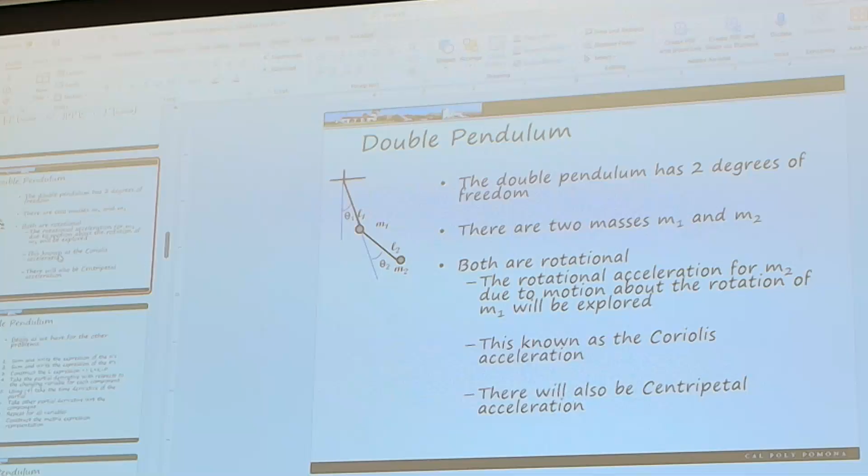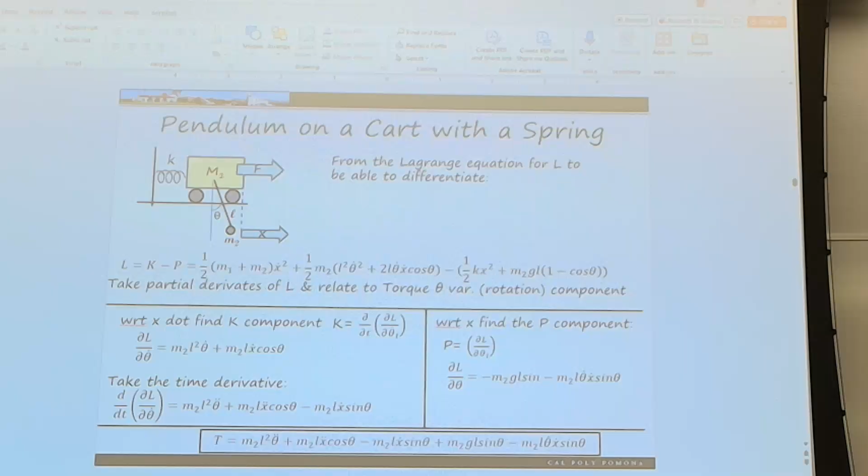All right, so kind of recapping, the idea of using Lagrange is really where we can circumvent doing the detailed Newtonian analysis, and instead we're going to be looking at it from an energy perspective. And we looked at it here when we were talking about this pendulum with a cart, where we looked at the force, and we could look at the torque. And so we're looking at those different variables, and the process of doing Lagrange.

Really, we compute this L, which is the difference between our kinetic energy and our potential energy. And we write the terms of our kinetic and our potential energies for each one of these entities. So we're looking at it in terms of the force and in terms of the torque. Once we find those, then we're going to take this L, which is that expression, and we're going to take the partial derivative with respect to theta dot, which is really the velocity that we've been talking about, and so that's our motion.

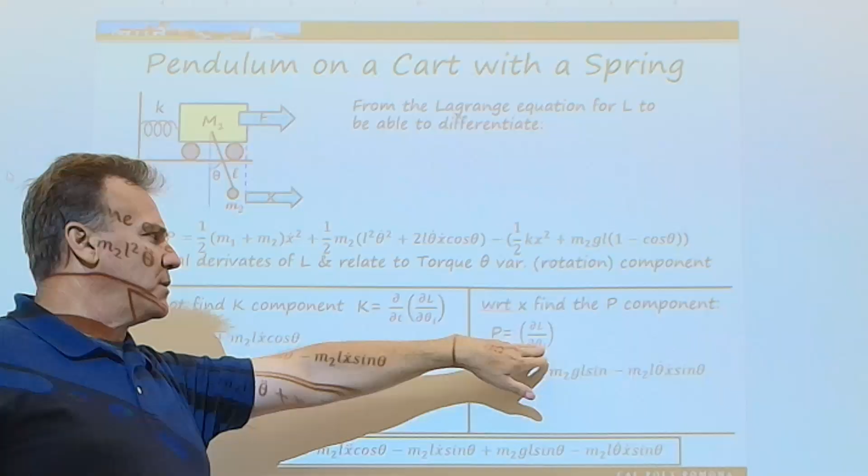Think of that as our motional force, or the force per motion, and this is our potential. Right? So then we're taking it with respect to not the velocity, but the quantity itself. Because we're looking at this right here, we then take the time derivative, because we're really looking at the velocities. So we're looking at velocities relative to a particular parameter.

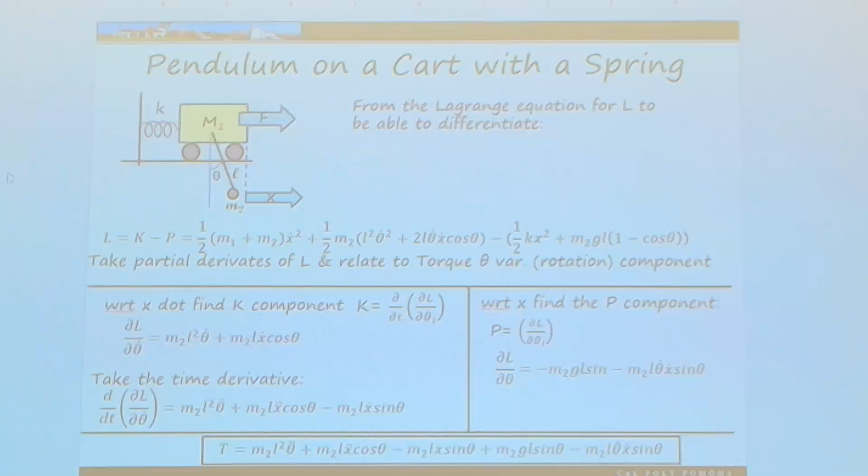That's the idea behind taking this one there. So we have this relationship of L, and we have this relationship of L. So we have this one and this one. So here is our P, here is our K. We do that for both types of quantities.

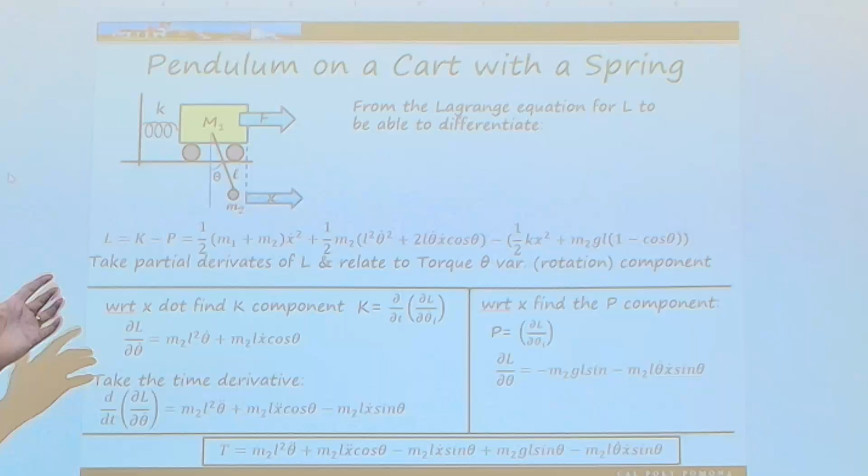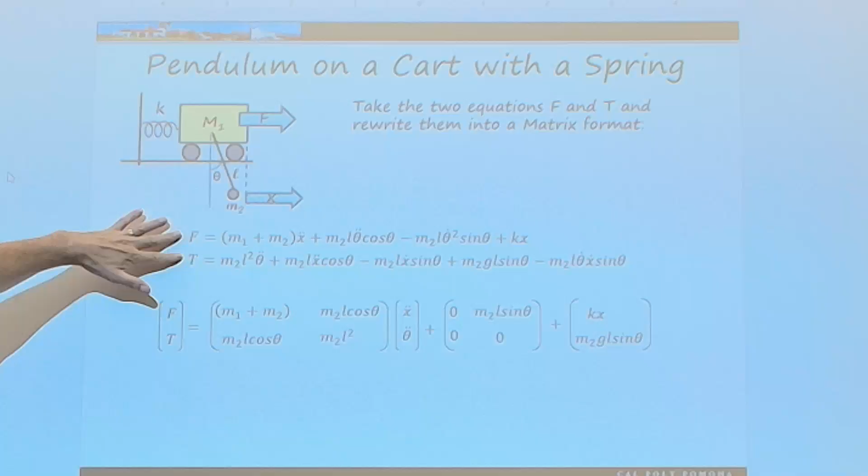So we're looking for the force of this and the torque exerted on the pendulum that we had right here. All we have to do is write those expressions. Once we do that, we can combine both of them together so we can express the relationships of the two energies through force and through torque, and we have the Lagrangian relationship right here.

If you decided to do this using Newtonian, this would work too. You get the same answer. One's a little bit easier in the sense of it's much more methodical.

This is a methodical approach. You kind of just do it, and you go through and you take the derivatives, take the partial derivatives, take the partial and the derivative again, and you're good to go.

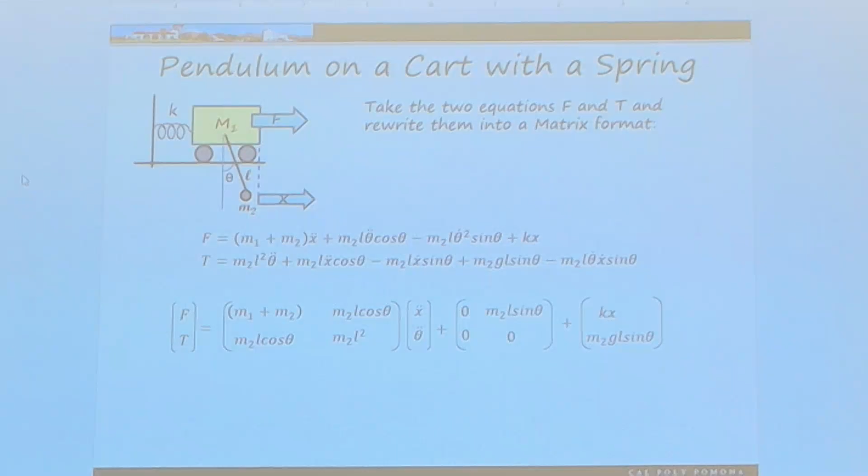Okay. Any questions on what we were talking about on Wednesday last week? It's pretty straightforward. Yeah. Because we can talk about this double pendulum.

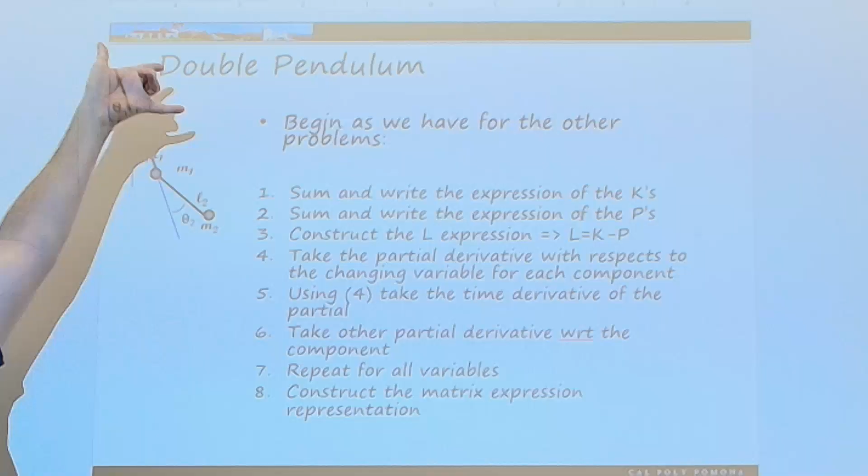In the double pendulum, we were talking about, if we look at it, it was really, if we flip this upside down, almost it looks like a robot arm that we talked about before. Right? I think we've done that before. So we could use that same process.

And so initially we'll talk about it as a pendulum, but at the end of the day, it doesn't matter if it's a pendulum or not. It's really got these couple of joints. And we can do 3, 4, 5 all the way down. But again, we go through that same exact process.

Write the expressions for our K's, write the expressions for our P's. Find L, nothing more than K minus P. Take the partial derivative with respect to the changing variable for each component. So we would do one for theta 1, we do one for theta 2. That gives us these two masses.

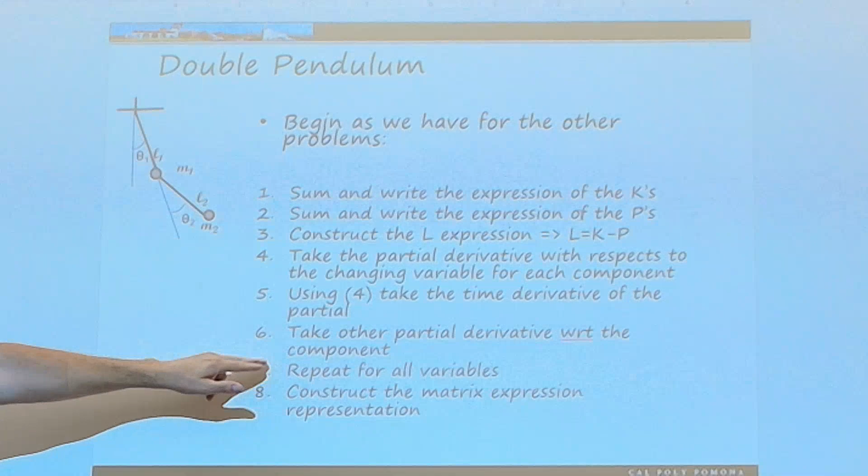We then take the time derivative of the one that we took the partial derivative of from this guy. Take the other partial derivative with respect to that component. Repeat for all variables. Okay.

So we just kind of do this over and over and over. If we had 3 joints, we would do this 3 times. Theta 1, theta 2, theta 3. If we had 4 joints, we would do 4 times. Theta 1, theta 2, theta 3, theta 4. So on and so on.

Yes, it gets tedious. I'm not going to deny that. But we can actually write code to do that kind of stuff for us. So we can actually find the Lagrange from a computational perspective much easier than just going through trying to see this big picture, doing the Newtonian, doing all the free body diagrams, yada yada yada. It gets tiresome. So here's what we have right here.

So in our double pendulum, we're going to have our kinetic energies. And that's what we have in this case. So we have the one with theta 1. And then we have theta 2, which is really a combination. This is a combination of this angle and this angle.

So if we're looking at the force on the mass or the torque on the mass, we have to recognize there's a common element of theta 1 and theta 2, not just theta 2. So we see that double angle that we see right here. So we see the one by itself, and we see the combination of those two. Everybody with me so far on that?

So we're looking for the kinetic energies, so we find the K1, the K2, here's how we find that. And we're going to get each one of them. And in this case, we actually found a velocity squared, and we'll see why in a minute, but it's 1/2 mv squared is the reason why. And that allows us to simplify in the future. You'll see that on the next slide after this, the following one.

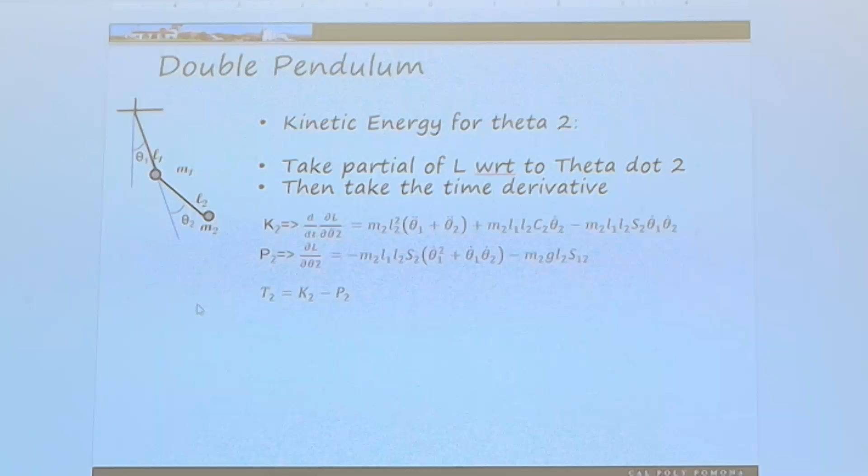Then, now that we've got that expression, we can do that for each torque, and we can actually construct them into the matrix. So we can do that. Here's 2—I think I skipped 1. So there's 1. And that's kind of the same thing here, but now we're doing that for 2. So here's dt of partial with respect to theta 2, and then this is take the L, take the partial with respect to theta 2, given the L that we had. So again, we're starting off with this L right here. And there's just simple calculus.

So we go through, we do T1 and T2. We can matricize both of them and extract our variables so that this becomes the relationship for theta 1. This is for theta 2. This is the second part for theta 1, and this is the second part for theta 2. Notice torque 1 is going to have this component, right? It's got this guy right here for theta 1. And then theta 2 is just going to have these guys. And what's interesting is here you see that this only uses the theta 2s. And then we've got this expression right here.

So this is actually like our angular acceleration, right? That's going to be theta double dot. We know that theta double dot is an acceleration of the angle. We could have called it alpha if we wanted to, but we'll call it theta double dot. What we see right here is the square of a velocity. And that's like an acceleration, but it's not quite. Same thing over here is like an acceleration, but it's not what we think of as a rotational acceleration. There's something else—as it's increasing the velocity, we see that it's growing. So it's not in the truest sense an acceleration, but the velocity is growing at the square. That's the contribution of that torque. And we see that same thing here, except now what we see is the velocity of each component impacted onto the torques, torque 1 and torque 2.

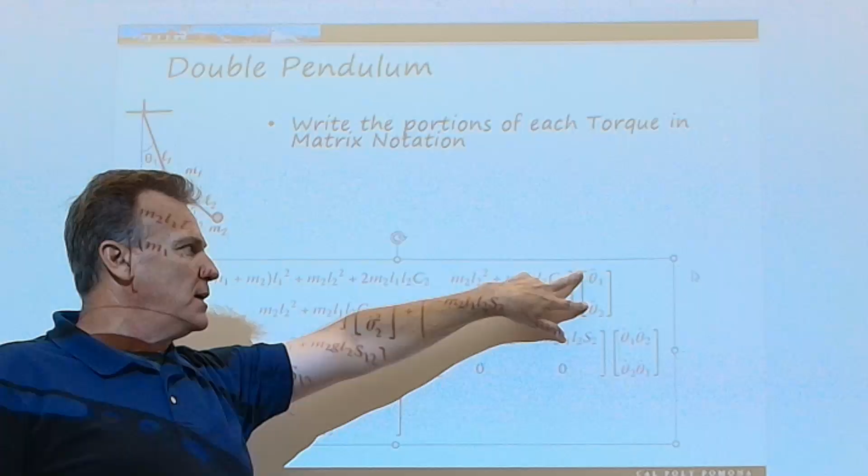Here we just see masses, we just see the length. So as this thing is being flung around, as it changes as a function of thetas, as it's accelerating, there's a torque applied. This is as it's rotating.

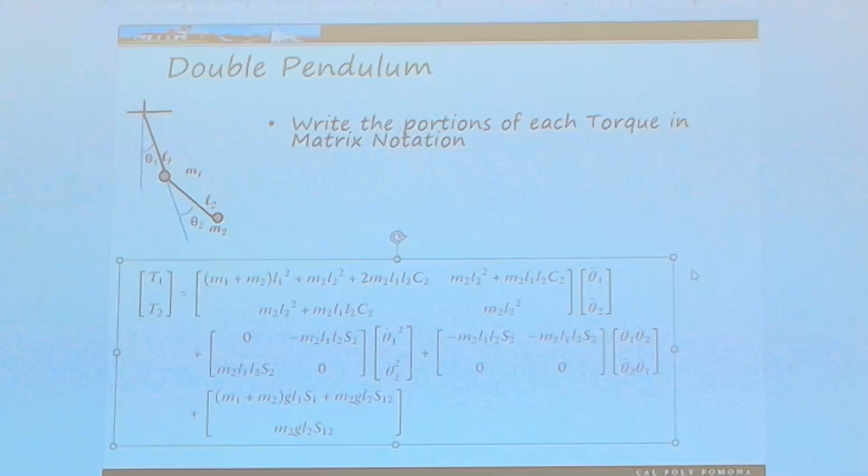I should have brought a yo-yo, but I'll do my own fist. Oh, no. So as I spin this, there's a force, right? It's pushing out, right? We call that centripetal force.

It's constant velocity, but there's an angular acceleration nonetheless, right? We know that. Then there's that rotation—if I had a mass attached, we would see that there's that guy hanging out over here, as it's swinging around, it's at a velocity, it's pulling this velocity with it, right?

That's what this one's doing. All of them are affecting the torques, because pulling on it, right? It could be pulling on as it pulls on. That's this guy, pulling on as it pulls on. So it's like a coupling term.

And then this becomes basically the potential energy, how much we're flipping around from gravity. Pulls it back down, pulls it back down. We get into that periodic motion. All right, hopefully I can break my nose.

No, we're good. Okay, so when we look at this, we see the angular acceleration—that's what we were talking about here—plus the centripetal acceleration. That's the one that's pushing you back, right? It's the one where you get on the carnival ride and spin around and it forces you up against the sides, right?

We've all done that and then thrown up when we got off the ride, right? I never did that, I was like, I'm not going on that. That stinks—you throw up on that all the time.

Then we have this Coriolis acceleration, which is really a frame going around the frame. So if I had this one spinning over here, as this was spinning, it's the one spinning around the frame—we call it the Coriolis acceleration. And then we had basically the potential energy, or the gravity of that.

All right, double pendulum, make sense? Yes, sir, I'm just confused around the Coriolis acceleration. Since it's about the frame accelerating around another one, shouldn't there be values on that bottom half as well?

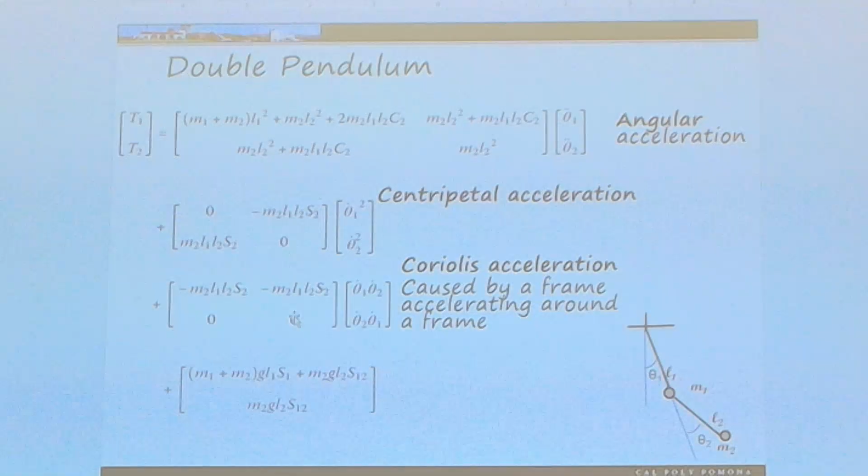So what if we were to do this for a 2 degree of freedom robot arm? It looks pretty much the same, doesn't it? We just flip that inverted, or that double pendulum upside down.

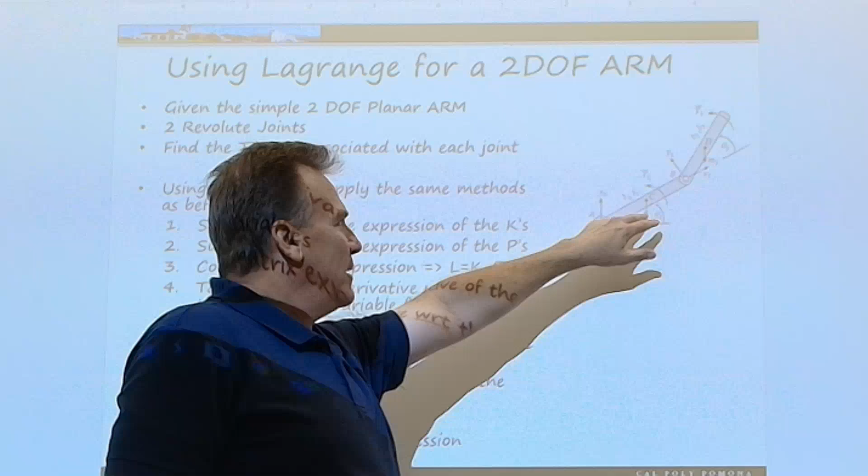We're going to have the torque about this axis, we're going to have a torque about this axis. We're going to have a theta, we're going to have a theta. We're going to have an L, we're going to have an L. Almost the same thing—the torque relationships will be the same.

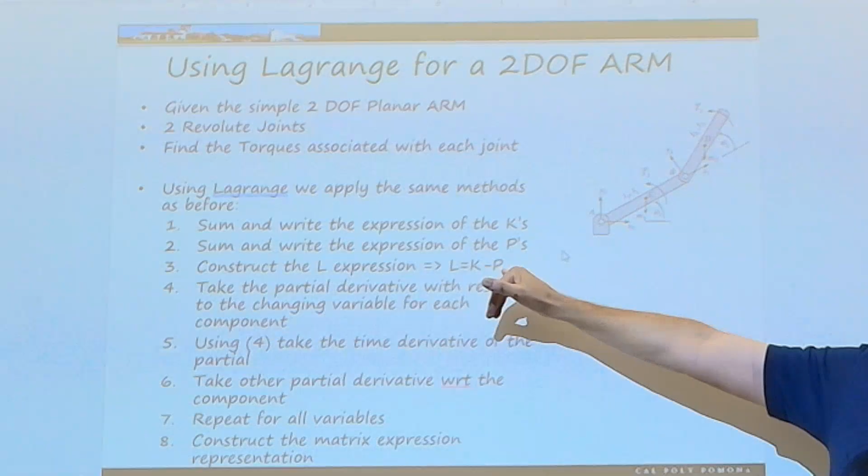The expressions for P and K, yes, those will be different. But the structure—find L, well, find K, find P, find L, take the first time derivative with respect to theta dot 1, theta dot 2. And then take the partial derivative with respect to that, and then with respect to time. The other one, we're taking the partial derivatives with respect to theta 1. Do it again, take the partial derivatives with respect to theta 2. All we really need to do is understand what the forcing function is for K and P, for each one, which isn't really that hard.

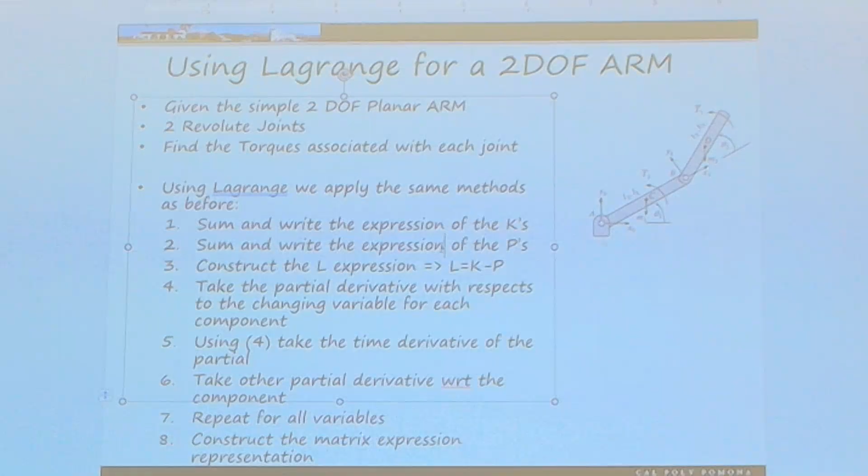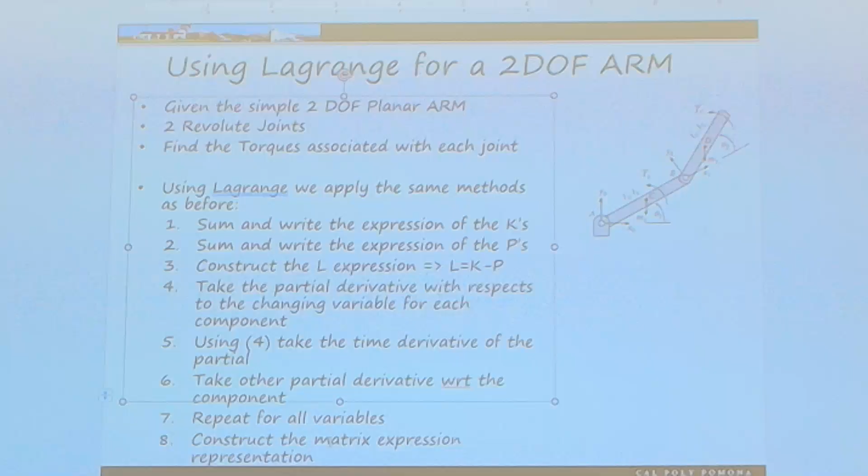So that's what we're saying right here. Write the sum of all the K's, write the sum of all the P's, find L. Take the partial derivative with respect to the changing variable for each component, theta 1, theta 2. Using that, take the time derivative of that partial. That's going to give us K. Given L, take the partial derivative with respect to that component. That's P. Repeat that for theta 1 and theta 2, theta 3, theta 4, etc. Rewrite them into a matrix expression. Done. Gives you everything you need to know.

This is going to come from the moment of inertia. And for all the electrical people, just nod your head yes. For all you electrical people, know that that's coming from the moment of inertia. Okay? Does that look familiar if you're from moments of inertia? Yeah. John says no. Yeah, man, I thought I was done with that class. It's come back and haunting me.

But for electricals, that's the MOI. Okay? So that's for that structure. And so that's the idea behind this one. We do need to know the moments of inertia for that. Several ways to find those. I prefer the integral method, but some of you might have learned the triangle method or the add things up method. I don't know what you guys learned.

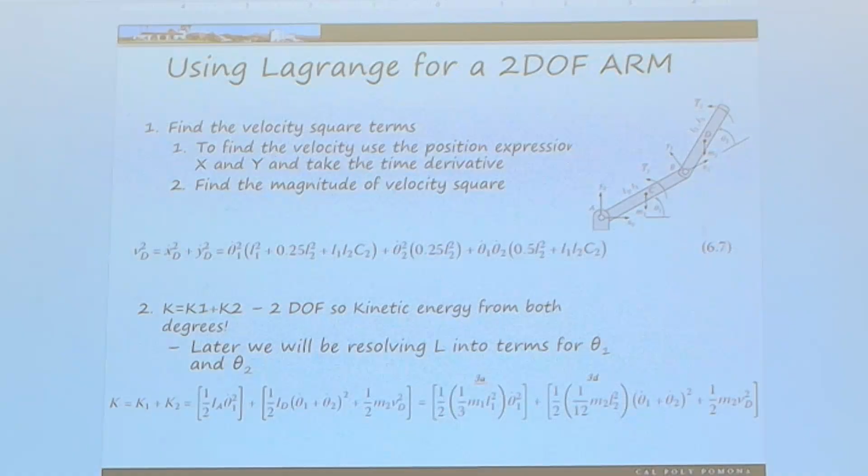Okay. So that's that part of it. So for our kinetic energy, we can clean this up and actually get it more into terms where we've basically solved for, or we've grouped all of our theta 1s, and all of our theta 2s, and all of our theta 1, theta 2. So out of the book, this is equation 6.9.

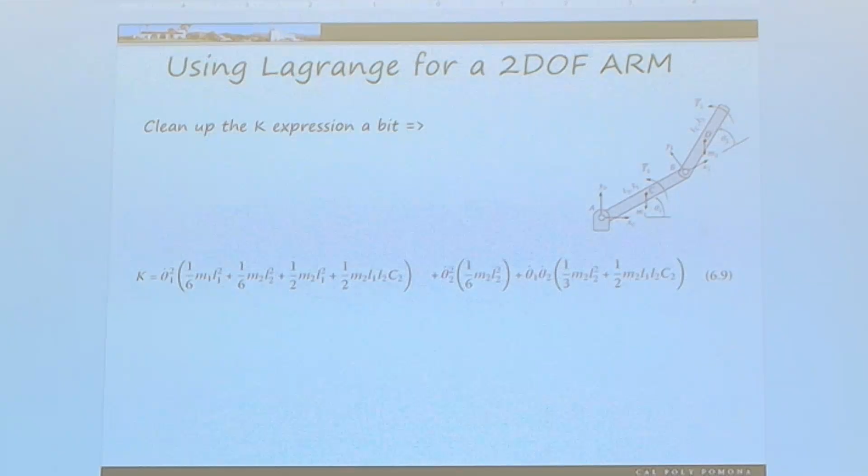You look at it and say, oh, it's the pendulum problem, and yep, sure does work that way. Except now we have a moment of inertia. We no longer have a point mass, we've gone from a point mass to a length of mass. When we go from a point mass to a length of mass, we have to use the moment of inertia to describe what that mass is. Even though it's elongated, there's that center of mass, the point upon which it doesn't technically rotate in its own frame. That's the moment of inertia.

Once we have L, we do the Lagrange, taking the derivatives in L to get each one. K is going to be the time derivative of the partial derivative with respect to theta dot. Find our potential energy by taking the partial derivative of L with respect to each variable of interest. Find the torque, which is kinetic minus potential.

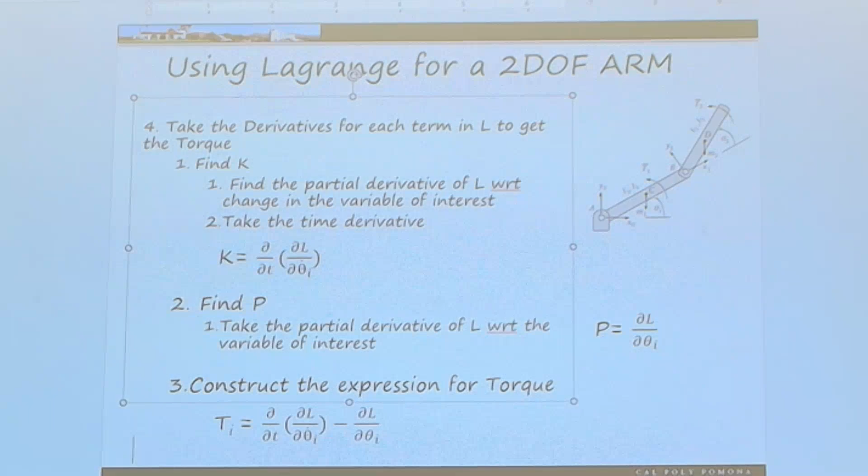So we do that again for both torque 1 and torque 2. We solve both of these problems, and symbolic evaluation tools make this easy. Once we can construct L, we can let the tools do the derivatives for us and let them do the calculus for us all day long.

Not saying you have to — you can use the tools because you've already done your calculus class. That's the whole point. That's why I'm not going through and grilling you on this, because this is not a calculus class. I'm not grilling you on calculus.

We could spend 3 weeks doing Lagrange. Doesn't anyone want to do that? I mean, we spent 3 weeks doing transforms — it's a lot more fun. But that was the reason why: it wasn't by rote, it wasn't turn the crank. You had to understand what was going on, wasn't it? This one is not like that.

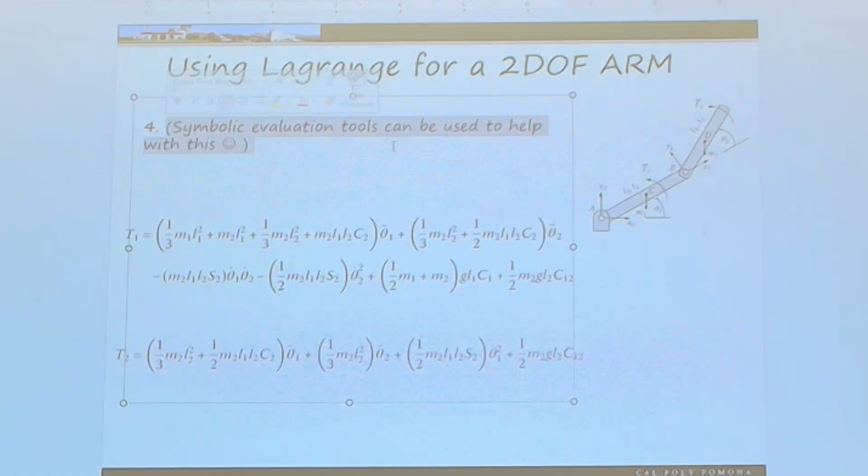It just chains together. Remember doing the chain rule in calculus? You had to do the one side, the one side, the one — that's all we're doing. We would literally just chain the mass to the next one, but it's going to have that coupling from the prior two. So you'd have L3 over 2 cosine 1, 2, 3, and here you'd have L1, L2 plus this, plus that, times the M3G.

That's it. So you could very easily write this in terms of iterative variables, of i's and j's, and just work through it, right, like a summation?

Potentially, yeah, this would be a summation term. But it'd be a little bit trickier because that's kind of gross, but yeah. Okay, I get you. Yeah, so you could do it in iterative variables. You can begin to see the pattern.

Once you can do that, that means we can compute it in the computer all day long, or we can use symbolic algebra or symbolic systems to do the problems for us. But we have to set it up to begin with. Once we find P, once we find K, it's a piece of cake. So finding P and finding K are the only differences — that's where your brain comes into play.

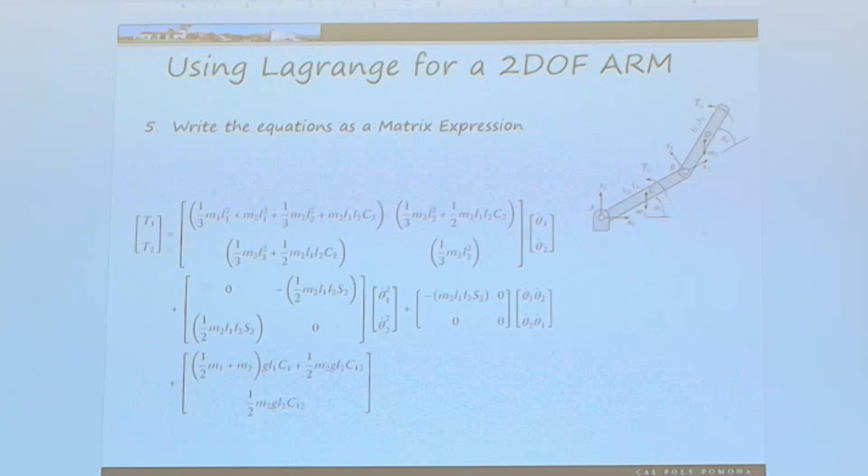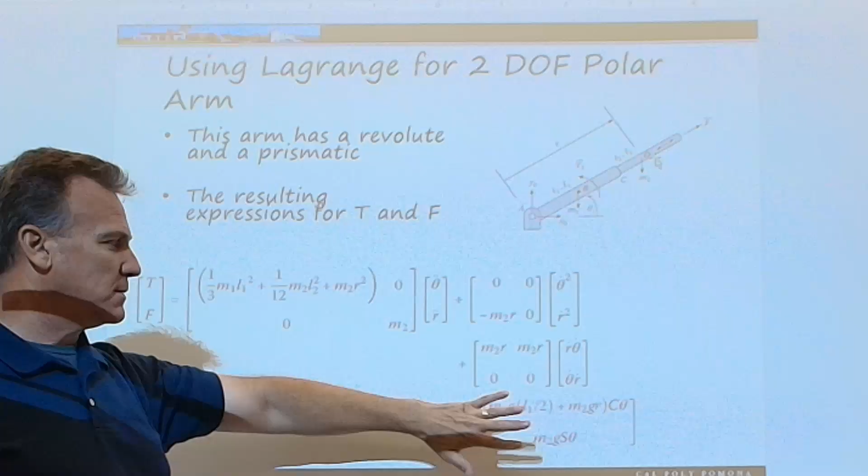So it's the same process every single time. We can call them different things. The tricky part is just coming up with the initial K's and P's. That's it. And that's really a physics problem more than anything.

Why do we care? Why? I mean, why? So what? Why do we care about what the forces are on our robot arms? Right? Holding torque. What else?

As I'm extending out, the robot, unlike what your robots might be doing, generally the arms don't move one joint at a time. There's more fluid motion, right? So we're trying to figure out that path of what we're doing. We saw that in the IK, remember? When we were doing the IK on Coppelia Sim, the inverse of kinematics, we didn't worry so much about force.

And on Wednesday, we'll look at that. We're going to go back and revisit that IK. You're going to see the force depending on how far it has to extend out. So I'll redo the arm, I'm going to move it in, say, X and Y, and that arm's going to have to reach out, and then I'm going to move it up, and we're going to see it. Unfortunately, the IK doesn't let me do all three axes at the same time. But we're going to see that force change, because the arm's changing, right? It's changing these dynamics, and they're all very parametric to the overall design of the arm.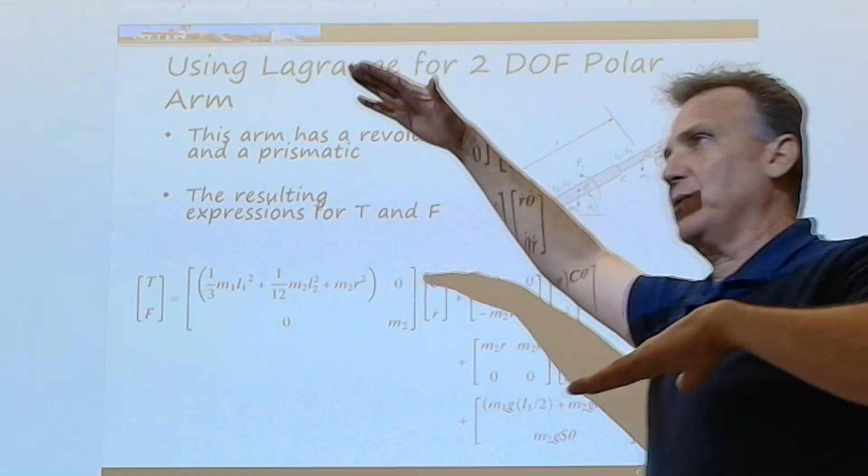We have to be able to control the accelerations. Because if we try to accelerate too fast, to go from V0 to V1 in our differential motion, we can only get differential motion through acceleration, right? We can only get differential position, differential velocity through acceleration. So if my tip is moving along, and that tip is moving so fast that I've had to accelerate that profile, I know how much torque I have to exhibit in order to follow that, to get to that velocity. That's why we're talking about this.

So to get to that velocity, I have to exhibit an acceleration. I have to exhibit a torque. Now, what if my motor can't produce that torque? It's all over, right? Now, let's take that one step further. Iteration 1: my robot can't exhibit that torque to get to that velocity. Do I go home or do I do something different? What do I do?

Pick a different... not direction, not geometry, not motor - velocity. Just don't go as fast. Or it's the torque curves. That makes sense - maybe if I get stuff to get to that velocity, I accelerate slower. Because acceleration drives that torque, right? It's the acceleration cross the moment arm, F cross, MA cross moment arm is torque. That's all we have right here.

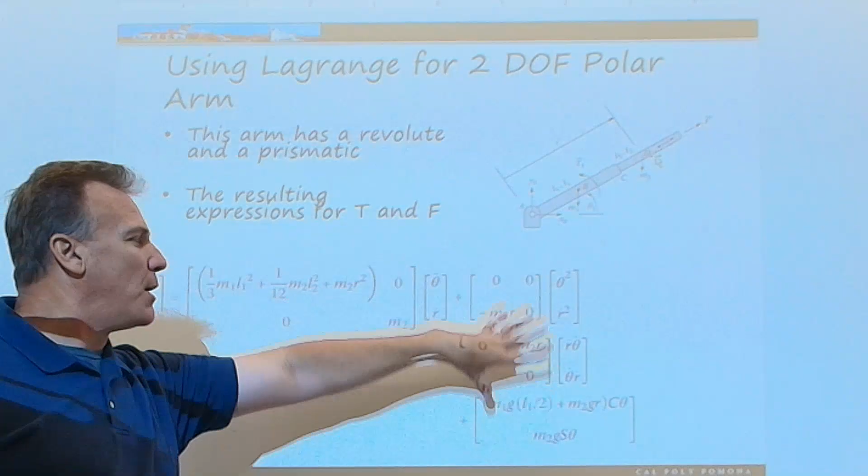Here's the moment arm, L. Here's my mass. Here's my acceleration. There's my torque. That's all it is. However, there are other components as this thing is getting longer, or maybe that sub angle we saw before is flipping around doing its thing, so it has a contribution to it. But at the end of the day, I'm trying to find out does my motor have enough torque to get to the velocity that I want in the time I want to get to it at.

So for this, you would just plug in your motor's max torque to then find your maximum, and can I get there with the acceleration I want? If I can't get there, I either change my velocity and keep my constant acceleration, or I reduce my acceleration and take longer to get to that velocity, which is exactly what we talk about next chapter. So far, we've only talked about constant acceleration.

Now here's the other question. When you guys get in your car to go somewhere, do you hit that accelerator and hold it at a constant acceleration? You try to, but you'd hit somebody in the process. So how do you drive it? When you get in a car and want to go somewhere, do you accelerate constantly? No - you feather the accelerator, you kind of lean into it, then slowly take your foot off.

So you're really working at the third derivative when you're driving a car - you're changing the acceleration, you might even be changing the fourth derivative. That's jerk - no, the third derivative is jerk, the fourth is just the fourth, we don't have a name for it. You can call it the Star Wars derivative if you want, but that's not a very popular option. No one gets the joke. May the fourth - there you go. It's coming right now, it's coming up.

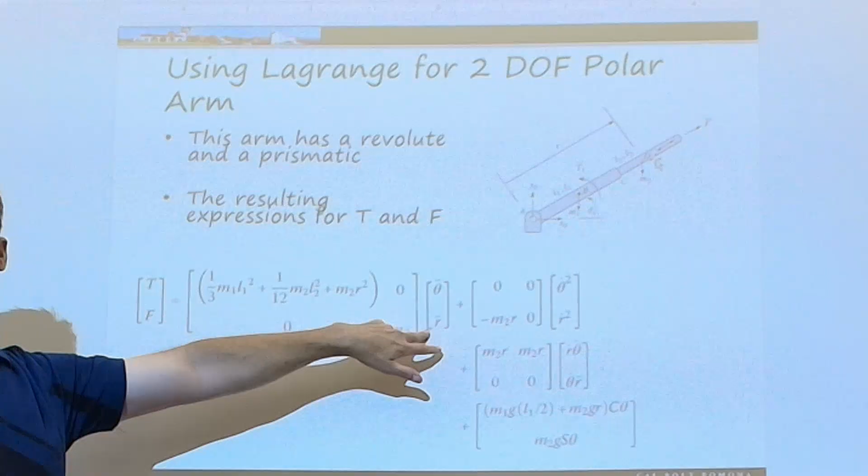Reverse engineer back - right, you can go back and forth through all of these equations, just iterating back and forth. So this is avoiding the Newtonian methodologies of free body diagrams with F equals ma. At the end of the day, it is still F equals ma, force equals ma all day long. It's just a complicated way of writing it, but it embodies all of the other components - the interrelationships, like we saw the Coriolis, or as this extends out, it changes.

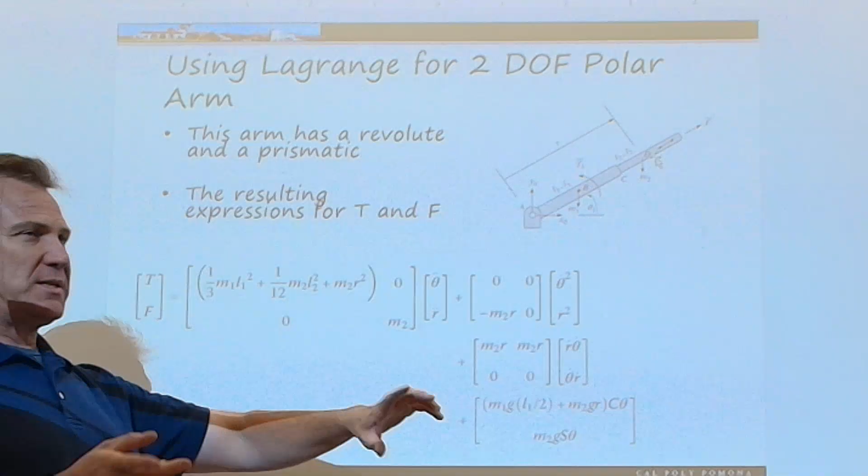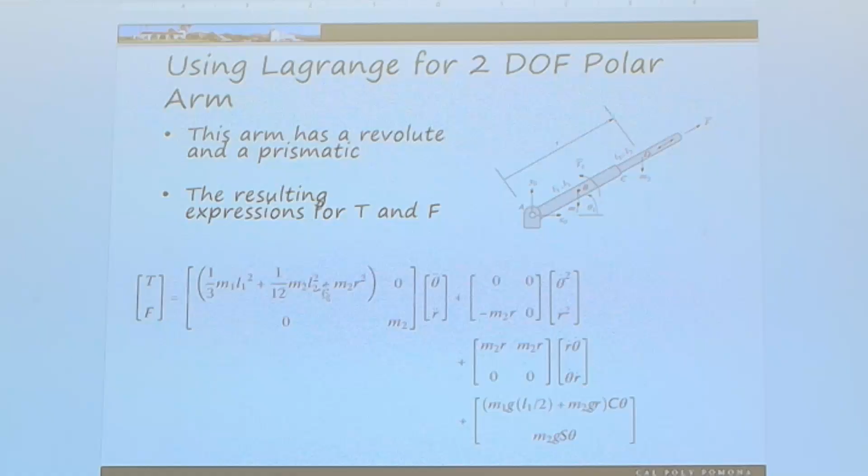So far, so good? All right. At the end of the day, they're coefficients, that's really all they are. These are our expressions, this is a value. At the end of the day, this is just a number. It could be 2.7, this could be 4, this could be 99.25, I don't know. Those are a little absurd, but you get the point. They're just numbers. Yes, those numbers are constructed from these relationships, and this is how we express them in math. But regardless of the arm, and regardless of the architecture, they're going to boil down to this structure right here, this 2 degree of freedom arm.

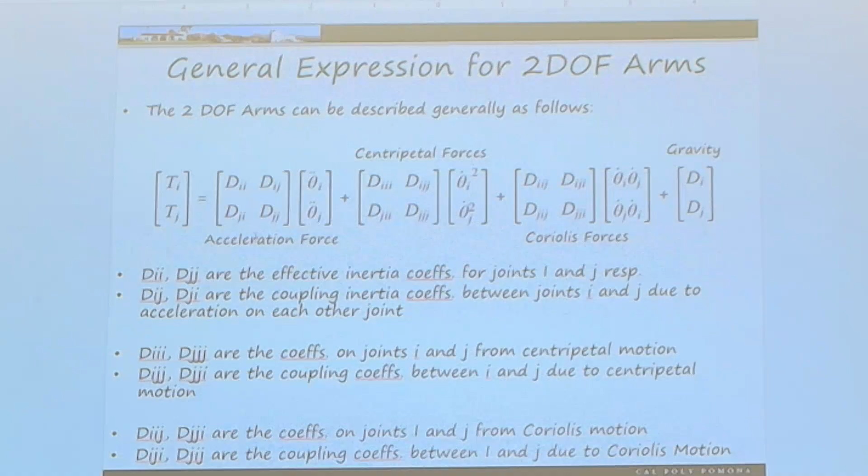So if we look at the Lagrange for multi-degree of freedoms, we can chain the Lagrangian process for anything above the 2 degree of freedom. It can be done, but it can be tedious. The modern way to do that is to use symbolic tools, symbolic forms. Okay, so far so good.

But is there a different way? As Din Djarin would say, this is the way. Wait, there's another way? What? Imagine you're watching Grogu and somebody says, no, there's a different way, dude. Not just this is the way, there's one more way too. What? Okay, well, what can we do?

Well, we can use the frame from each joint to describe the position from each joint to another joint. Wait, what? This sounds like remnants of chapter 2, doesn't it? I can use the frame here to describe to the frame here.

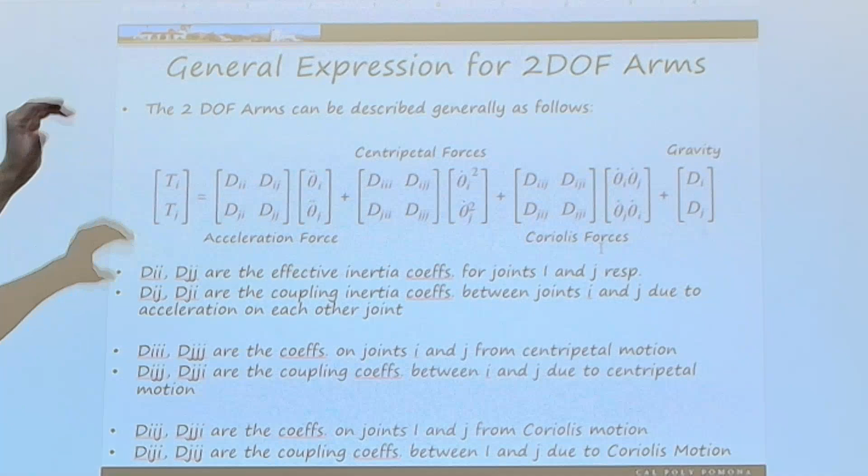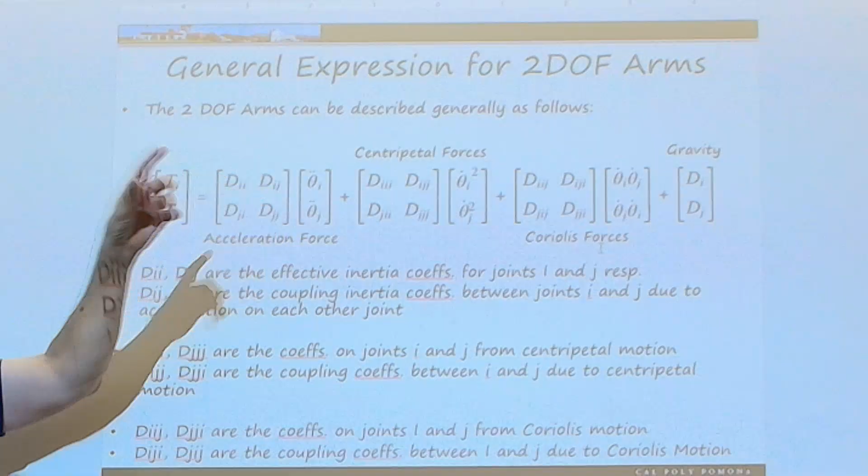Expressions are different, I would agree, you have to do that anyways. But once you do that, do I really need to do a 3 by 3 that I alluded to? No, I really don't. I can go 2 by 2, next chain all the way along, using successive frames.

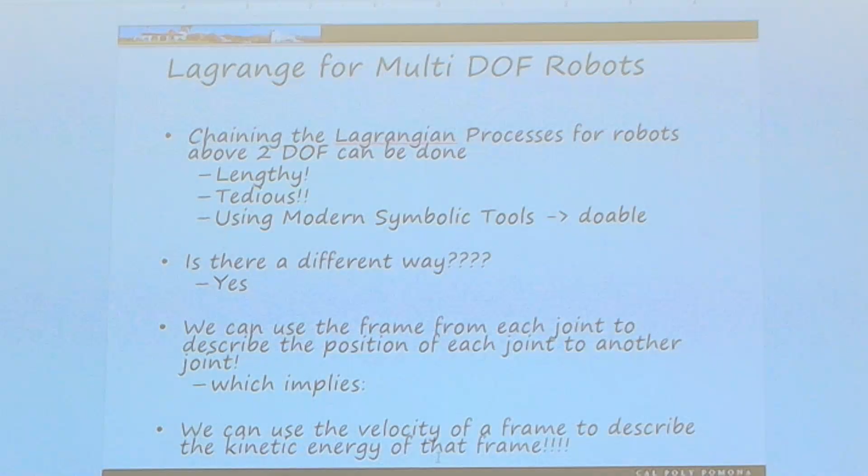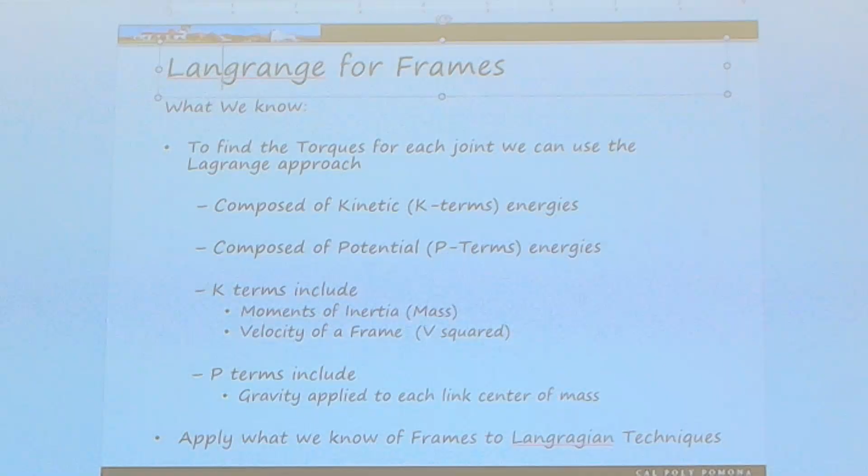So I can use the velocity from a frame to describe the kinetic energy of that frame. That was a lot of words. Yes, it was, that's why this is a highly theoretical chapter. We could do the math, but we don't really need it. Lagrange for frames. Did I spell Lagrange? Yeah, we did. Lagrange. Lagrange for frames. All right.

Dr. Bostovich, now what are you talking about? I thought we were done with frames. I got the K, I got the P, this piece of cake, I loved it. Right? So can we take what we know about the Lagrange and apply these Lagranges to frames specifically? Say, look at the end down here as well, Lagrange. Can we take that? And the answer is, yeah, we can.

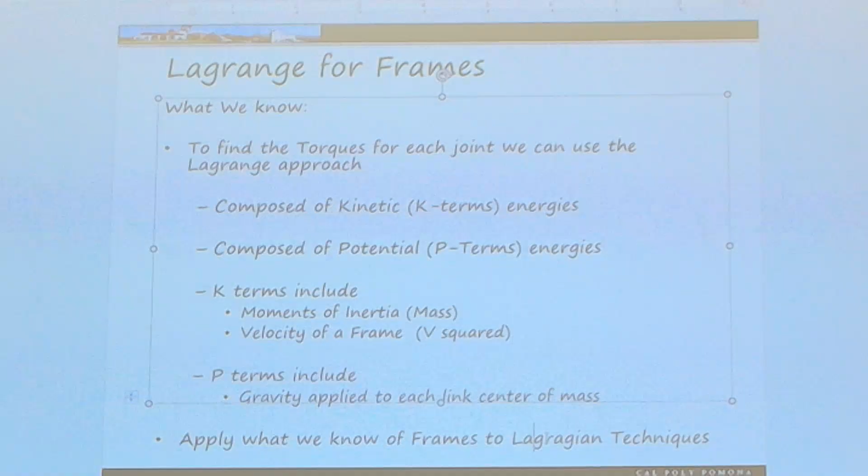So, can I take the partial derivative with respect to a variable of interest? Sure, why not? So if I do that, take that partial derivative of theta, I get to this guy right here.

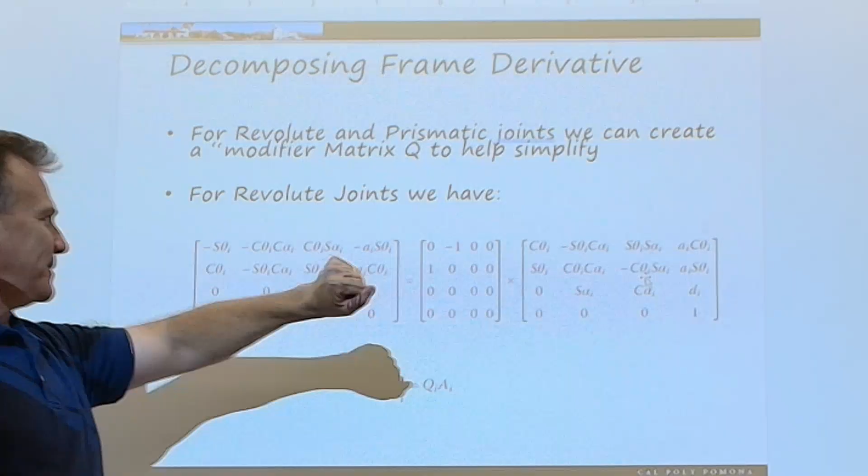And then I can decompose that one step further. And I see that, wait a minute—if I have this modifier up front, let's call it Q, then I can describe this guy and this guy. I can take some Q and transform this into this by that, because that's just nothing more like a transform.

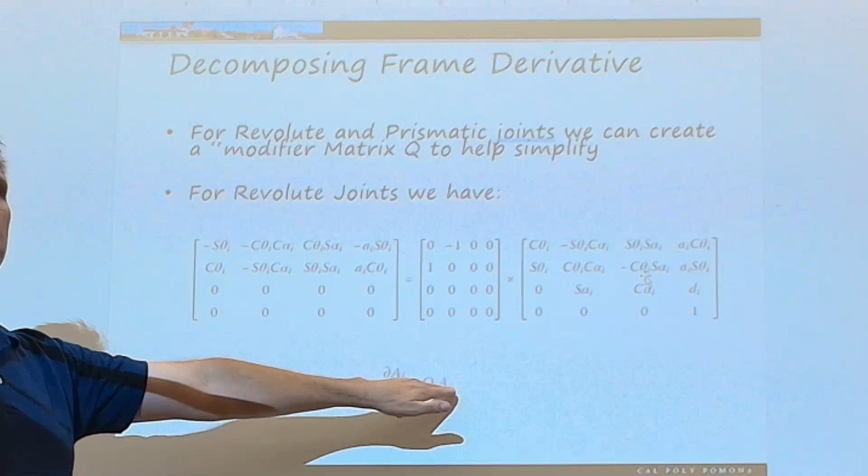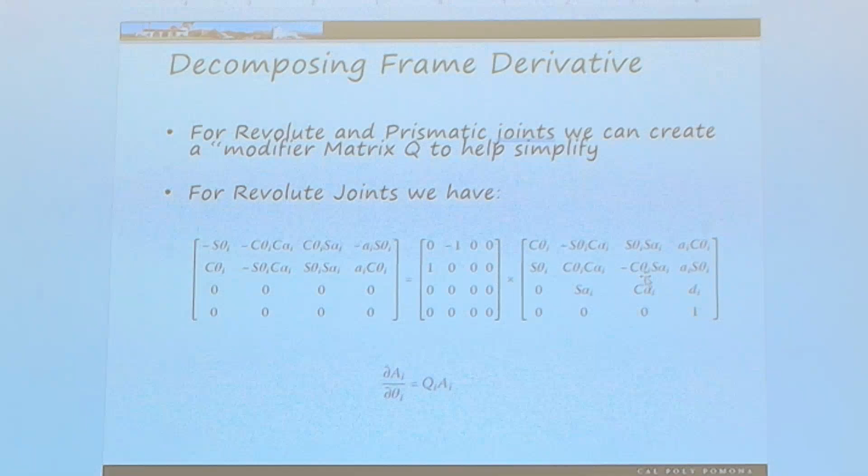It's a general matrix Q that relates the change of A with respect to theta from A. You go into your graduate level classes, you're going to see that equation all the time. I drew it on the board on Wednesday, remember? AX equals B, where B could be, or A dot. In fact, you're going to see this one a lot. You might see X dot is equal to A times X.

Now, in the controls world, these might be vectors. But what we're really doing is we're relating these two spaces by means of that matrix A. In this case, we're saying it's Q. So I can describe this guy to this guy through this one.

Oh, by transform. Kind of like a transform. Transforms are actually just doing the same thing. We just gave it a special name and backed into this discussion. So now we're learning where it came from, in a way. No, we derived T's from scratch. Yeah, we did, but the concept extends. That's the point of getting at.

And when you realize this, then you're ready for grad school. So you all should be going to grad school at the end of this class, because when you do, you're going to see that all the time, and you go, yeah, I got this, no big deal. When I was a student learning this, I was like, huh, okay, got it. Grad school, I've seen that before. No one told me when I was doing it in undergrad, but we're going to see it before. I'm giving you that little decoder one time.

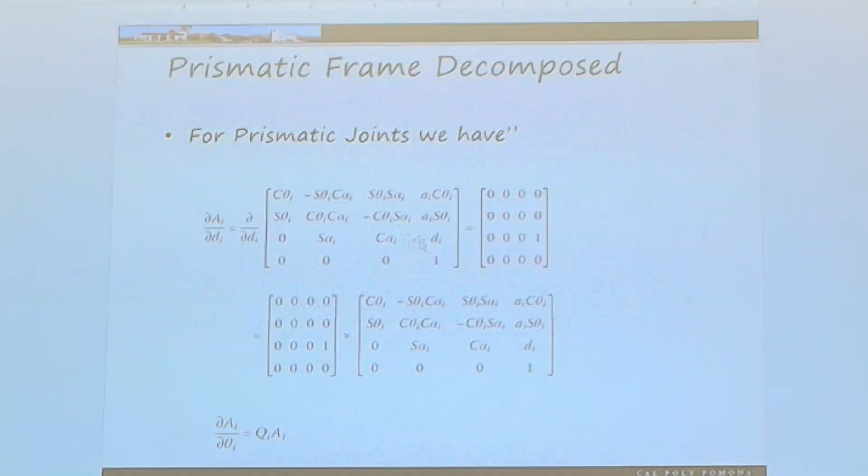The effects of it, so that we can construct these Q matrices. Q matrices are always constant. The Qi represent the joint variables for theta I and di, because theta I is revolute and di is prismatic. And so we see these two Qs.

So what we can do is perform what's called relative frame differentiation, where we look at the partial differentiation of a frame that uses the transform chain and Q matrices to arrive at our Uij. The transform I is being differentiated with respect to only one Q term. We can extend this to higher order derivatives if we wanted to.

So we could use a complete T-frame and go through and manage all of these along the lines. The point is, everything we did in Lagrange works with this. You can see how we got there.

I might have you guys work an example as a homework problem. I think that might actually be more beneficial. I'll probably give you two examples I want you to walk through on your own, now that we've had the full discussion on them. Is that fair? I think that would actually be a good homework. I've done that occasionally for this chapter, and I think it's a worthwhile endeavor, and it's as far as I care to go.

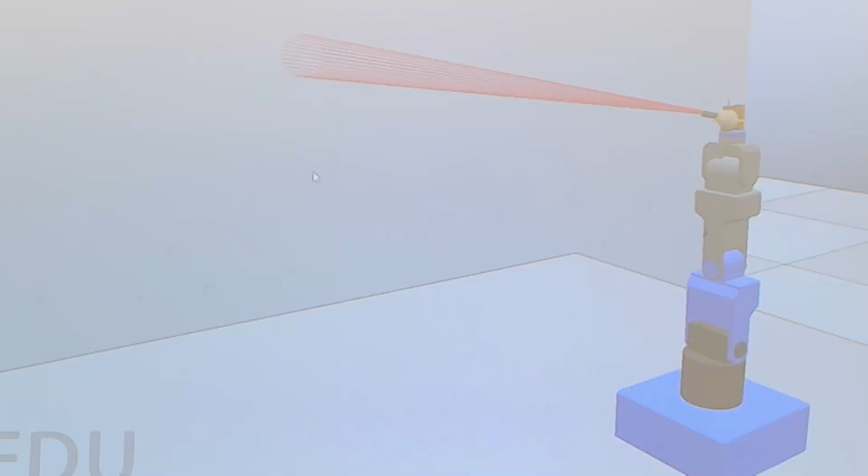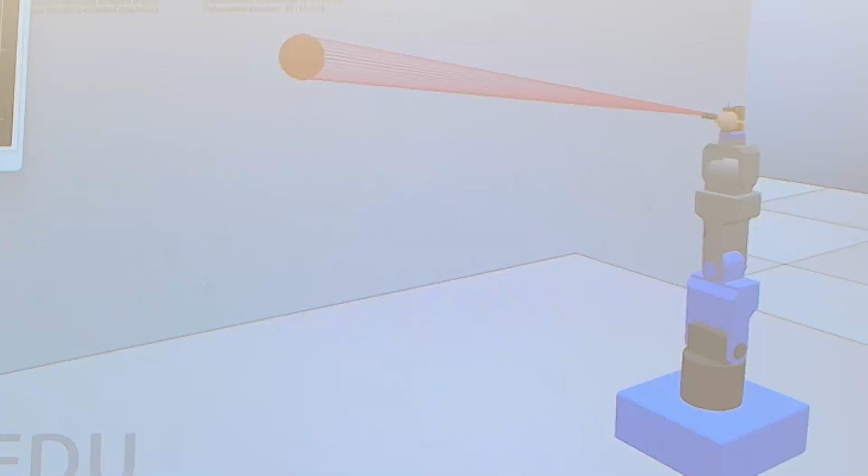Yeah, so let's go ahead and run the sim. And now let's go ahead and look. Position's not as important, I'll leave that a little bit bigger. Let's look at torque and velocity.

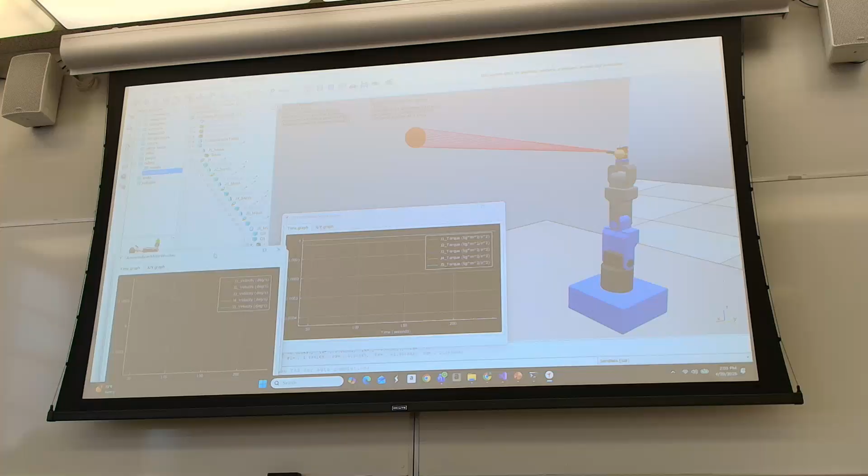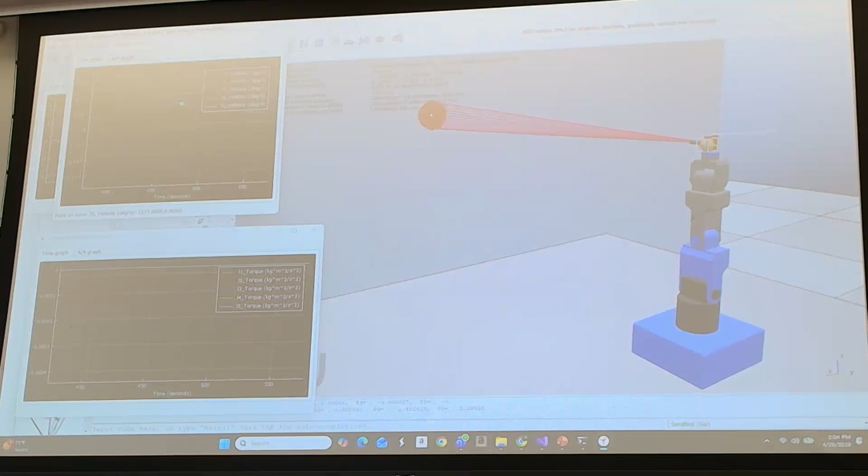All right, well, let's go ahead and make this guy move. I can't cover that up too much. Let's move along. Let's try to move along X and Y. I think you have the wrong two. Yeah, you do have the wrong two. There, now I think I'm right.

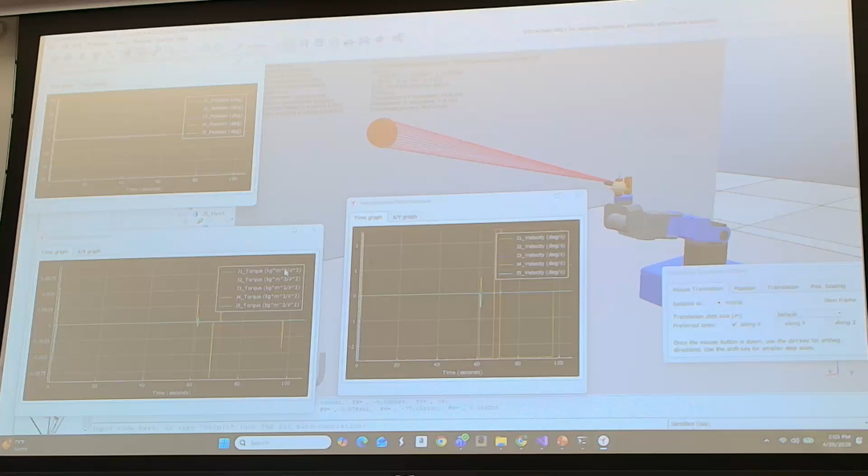Okay, so here's our torque. The one we're interested in really hasn't spun around yet. We're going to spin around, let's see. I think this one. Yeah, so we see massive amounts of torque right here on this joint right here, right?

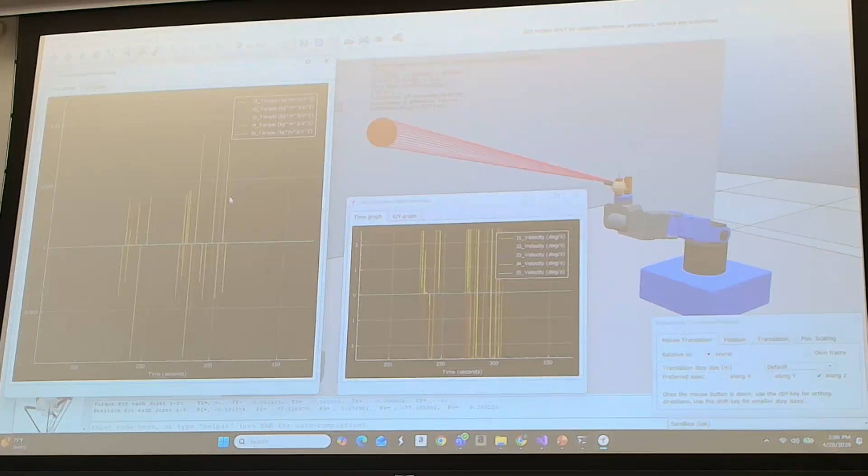Now, what I want you to look at, watch what's happening, maybe make this bigger. Are these spikes? So I move up and down, it's constant, slowly going up, slowly going down. But if I switch real quick and I see that direction change, notice we get spikes.

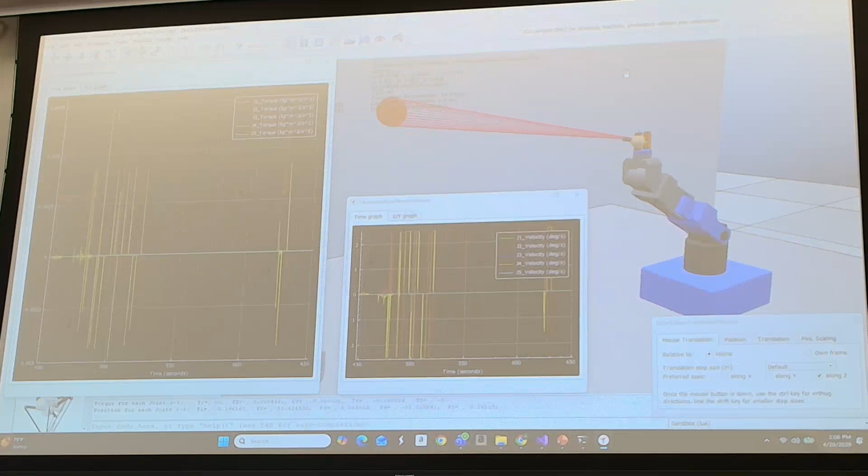So the question is, why do we get those spikes? The velocity? No. What's causing these spikes to occur? The instantaneous torque being applied. Instantaneous torque. Because you didn't describe to Coppelia how to do the acceleration.

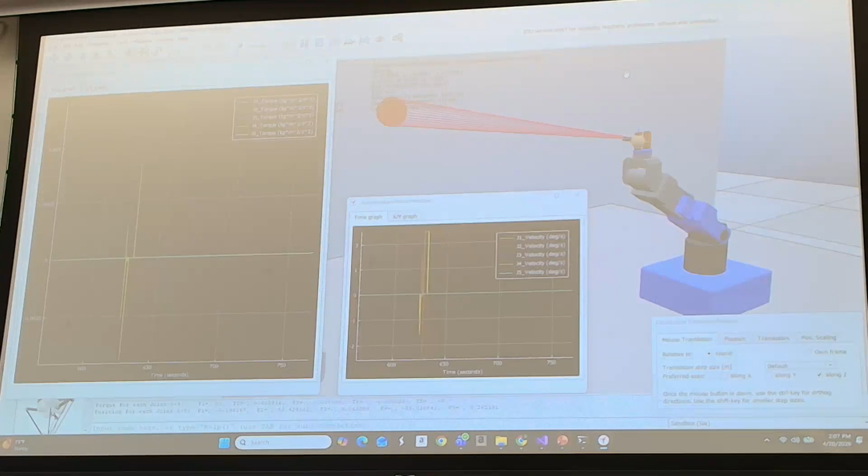You're only controlling velocity, so you're like, I want to go from 0 to 100 now. Right, that's why I have constant acceleration. Yeah, but when I change directions, I have a discontinuity, don't I? Maybe, yeah, I can't see. So if I change directions, I'll get a discontinuity caused in that axis.

Let's go ahead and change it again. Right, so it goes up, goes down, and that's when we get these two spikes. It goes up, down, right? There's that gap.

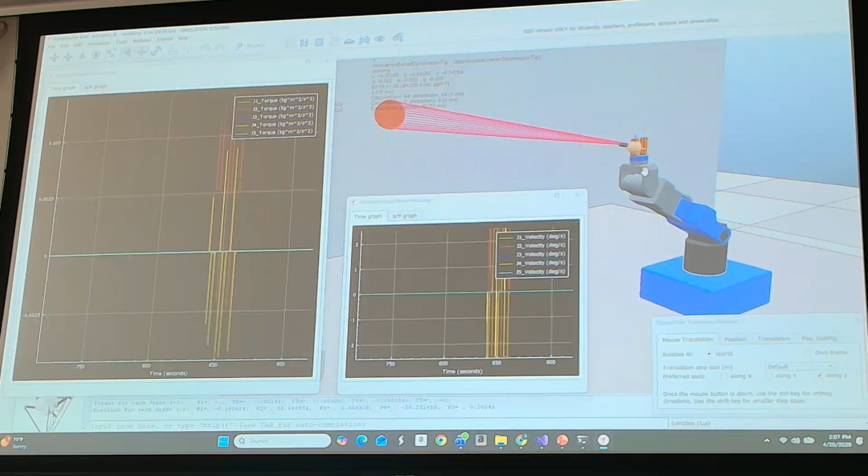I wonder if I can change the mass right now. Should we try changing that mass? Let's just see if we change the mass, I don't think it'll matter. I'll change the torque value. It will? Well, because in IK, remember, it does kinematics. It doesn't. Yeah, I don't know, but it's still measuring the mass. You might have to change the cuboid's mass on the bench.

Yeah, so let's see, primitive. That's the one we want? Yeah, that's the one you want. Do we want to do? You know it's the one you want because it's already enabled. The body dynamics. No, I'm saying, is that the joint? Oh, the joint. So let's change the mass. Let's make it, I don't know.

That should make a difference. Should, let's see what happens. You tripled it, let's see if it falls apart. No, that's a good sign. I need to find the right guy here. Destination. Now, if you remember how little it moved, I'm just going to turn the velocity off. Go away, yeah, I'm not even worried about that guy either.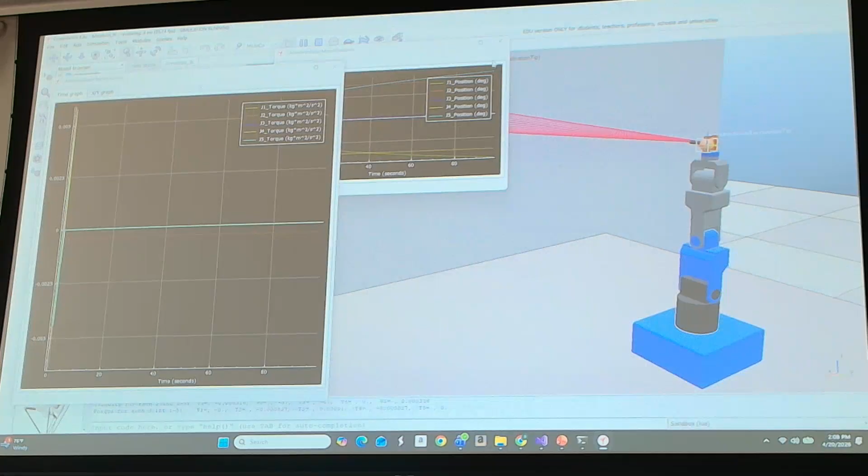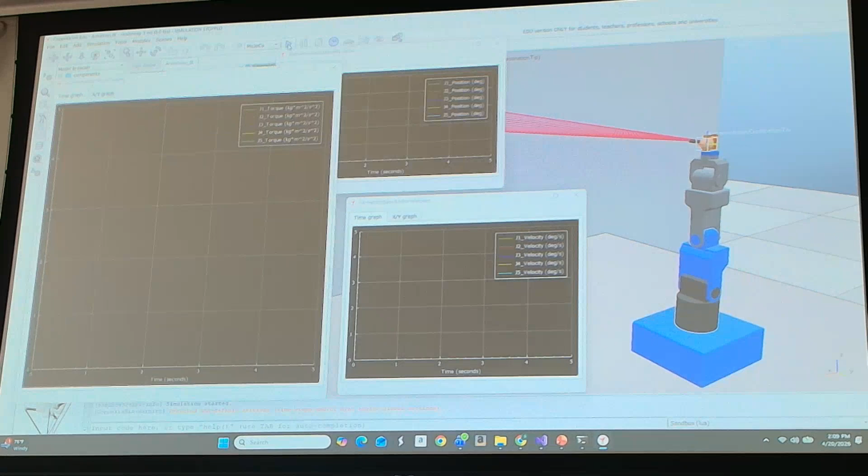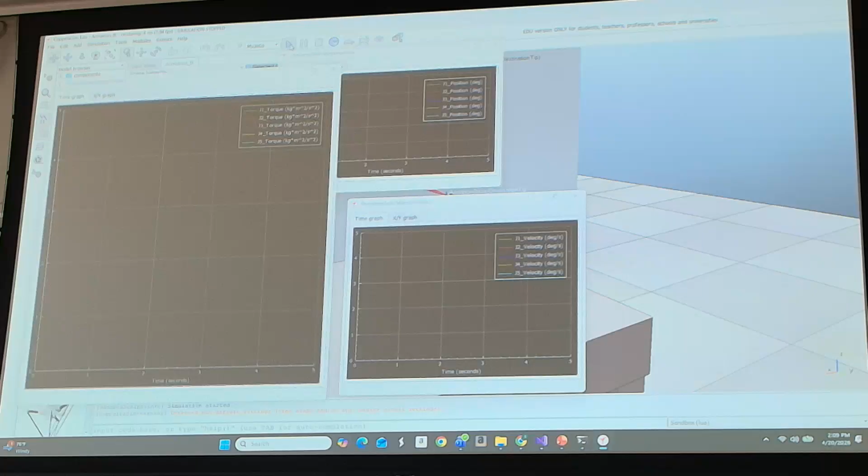Did I grab the wrong one yet? Okay, maybe the other one. Yeah, that's also the other one.

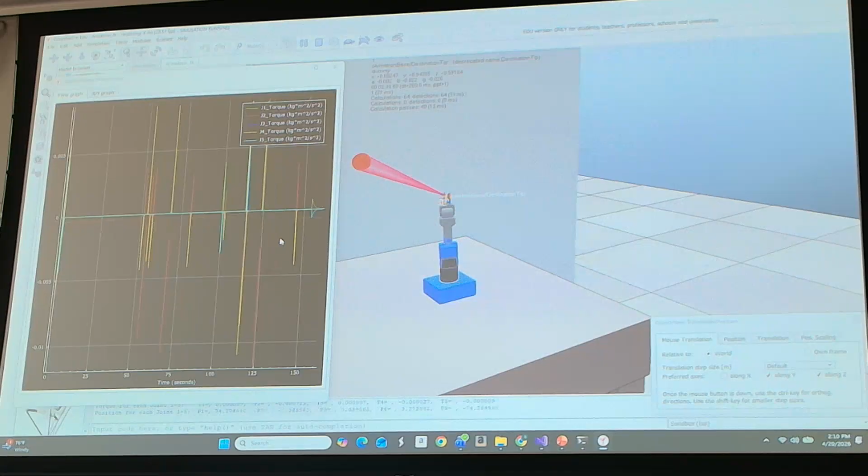So we can see there's a little bit of a profile right here that we start to get to, right? Let's see what happens when we get there. But it doesn't really, when it stops and when it starts, otherwise it's pretty constant acceleration. So theoretically, at this point, it's almost like infinite, isn't it?

So if my motor has enough torque, I mean, let's see if we can really break it. Should we try to really break it? Sure, why not? Let's really make that tip on that. Can you click on the joint real quick? Click J5.

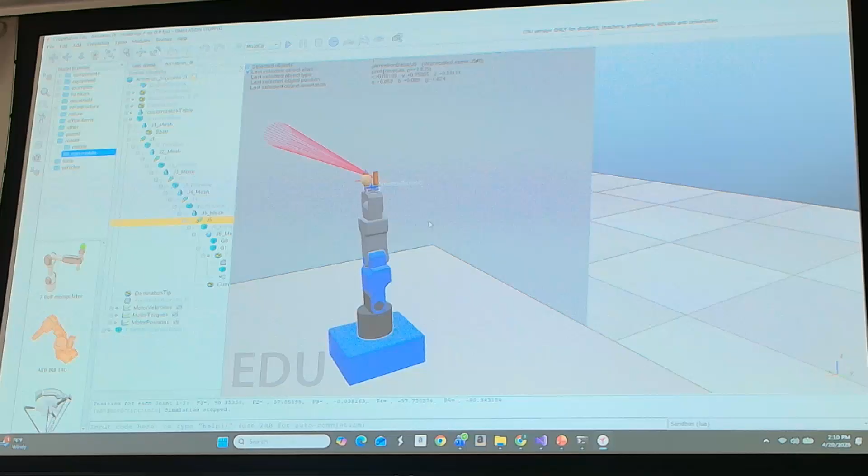Or no, J4 joint. Double click it. Oh, you want to change the torque? I just want to see what you have it set to, so we can figure out what will break it. 2.5 newton meters, that's pretty loud. Yeah, it is, you have to make it hefty. So 2.5, let's go ahead and let's see, the real question is what is this one at.

Right, let's see what that joint's at. 2.5 newton meters, I think all of them are 2.5. Yeah, I was playing the world's best motor. Yeah, there you go, just because I didn't want to have problems later on. But let's make that mass very massive now. So let's go ahead and make this, changing the mesh.

Let's go ahead and make it. Oh, you didn't save it? You didn't exit out.

That one's still on the mesh. No, it's not still the mesh, that's the already loading one. It's dynamic, you don't have to exit out each time, it updates just by clicking. Oh, did you change it when you had the sim running? I did, yeah, so that's why it only changes while you were in the sim. Right, so let's go ahead and make it. Do that again so you don't have to remember. It doesn't matter, I'm not going to save this anyway, I want this the way it is. Let's go with this, there you go.

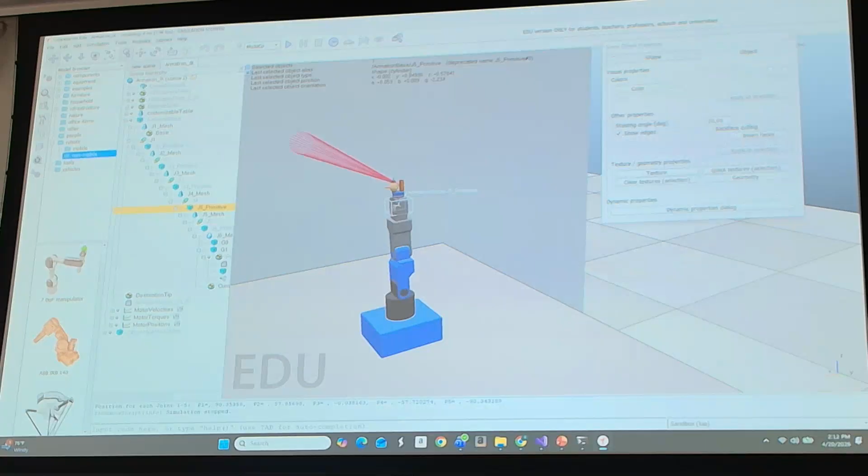That's a lot, it's going to break, right? Theoretically. So the question is, how do I really know what this should be, or is my robot capable of doing this? The Lagrange will give me that analysis, or I can sit here and play with it in Coppelia sim and see what happens. First, probably see through both. And we haven't moved yet, I'm at the initial stuff. It's like right underneath the mass. I have no idea what's going to happen.

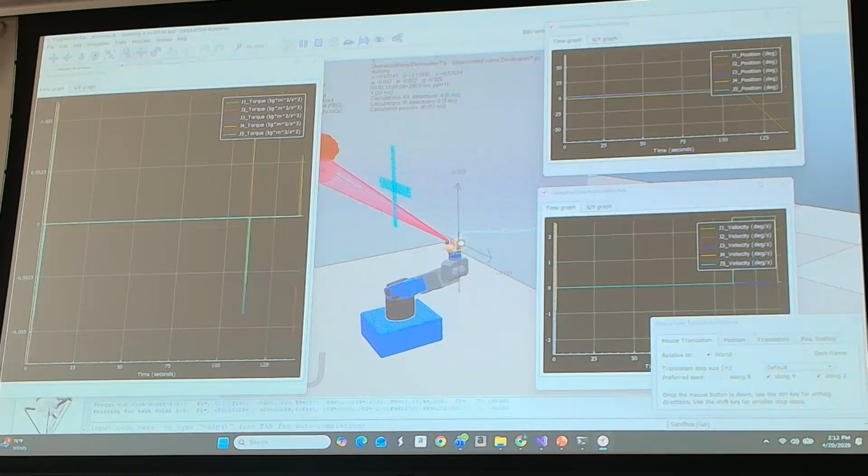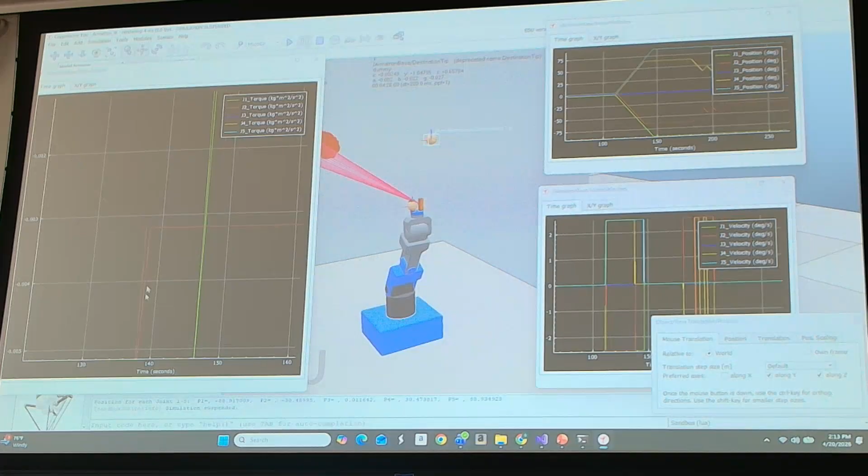This J2 is where it comes to a stop. When it comes to a stop, there's a discontinuity. Velocity goes from something to zero. So is there a derivative at that point? No, the derivative is undefined. So what we're talking about, this sweep here, why does it produce that? If it's undefined right there, why does it go more negative and not towards zero? It's because of the direction it was headed, it just continues the same. So that's why you see this fake continuity.

Yeah, that's what this guy is doing, goes way up here, okay, then down, then up. This is based on the direction, the previous direction, okay. So the derivative is... it's undefined. So the question is, well, what is it really? Suppose I had massive masses on there, and I can't account for that.

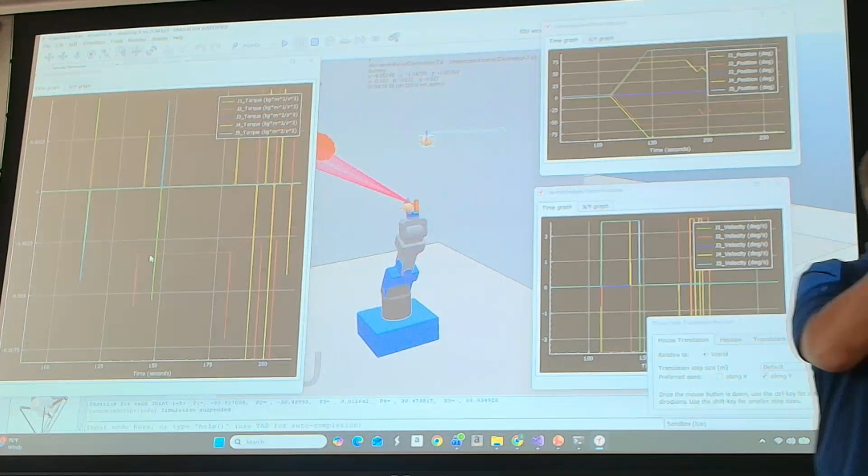So if I look at my third derivative, I can solve that, right? If I look at my fourth derivative, what if I controlled my third derivative so my second derivative could do a smoother acceleration? Or I can control my fourth derivative so that my third derivative was smoother. So I can control my fifth derivative so that my fourth derivative is smoother. You see where we're going with this, right?

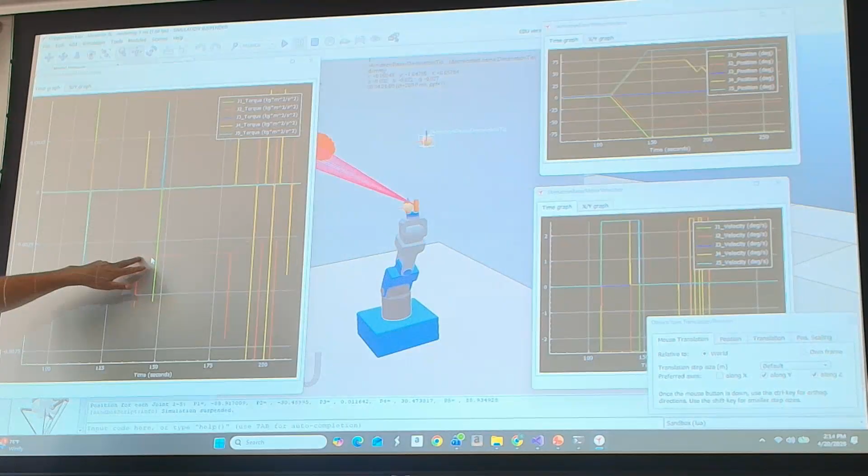So I can construct a motion profile of each joint such that I can alleviate spikiness, or my acceleration isn't too fast. I can decrease my acceleration, my rate of acceleration. I can control my rates so that I have nice smooth motion. Because we just saw, looking at all the Lagrangian, that everything is actually based on the acceleration. We started this course with position, velocity, acceleration. Now we're going to figure out what kind of motion profile should I use to the third, fourth, and fifth derivative from this point.

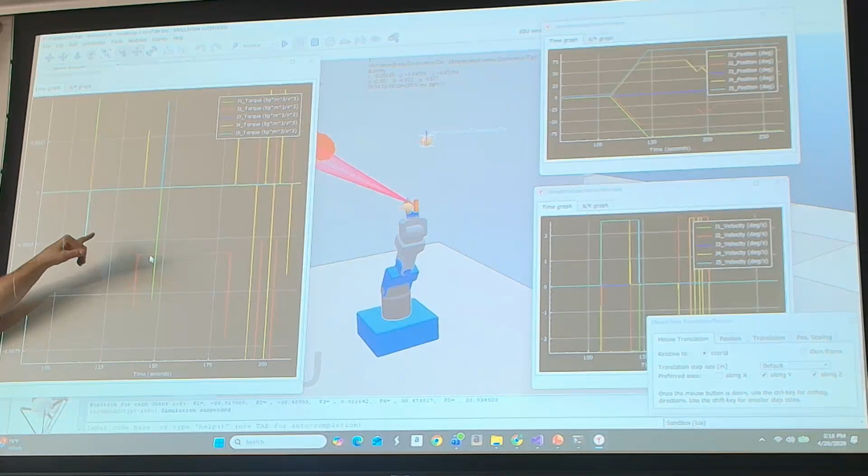Now we won't be looking at frames anymore, darn. We're going to strictly isolate one motor. So we've looked at how do we get to that position, what is the velocity that gets this tip right here as we control each one of these joints. We spent a lot of time on those two topics. We went through this Lagrange idea, but I'm really trying to get the acceleration, right? So I don't just go to an instantaneous velocity, I get to my velocity. But getting to that velocity, as we see right here, could maybe be problematic for my robot. I can't provide that kind of torque for it. So what kind of motion profile should I use in order to get there?

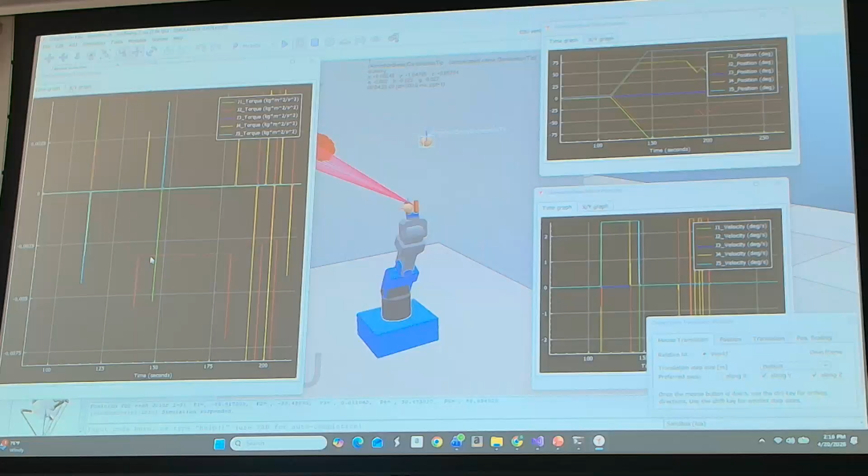That's what we'll talk about, so that's the next chapter. I will give you a couple of homework problems as examples I want you to go through, comment on, and understand. I'm not going to do the example problems for you here, because I think it's better as a homework problem at this point. Okay, we went through the theory.